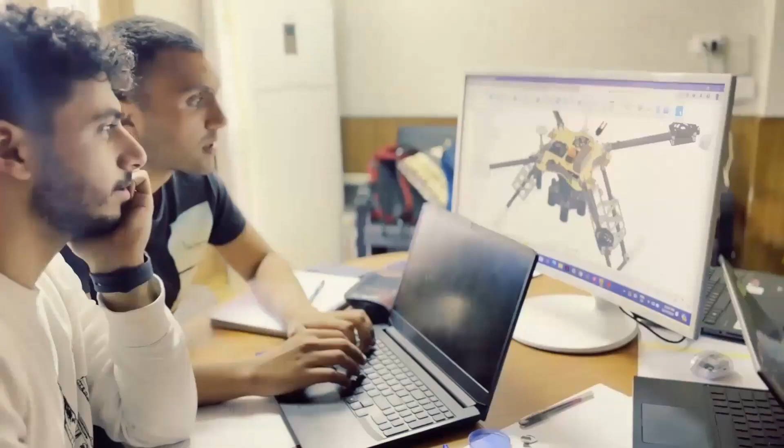This year we have decided to take on a new challenge and build a fully autonomous drone that is fit to compete in the SUAS competition.

For successful mission demonstration, our UAS needs to complete the given mission in less than 30 minutes. We have set the time limit to 25 minutes to account for unexpected events. The 25 minutes are split into 18 minutes of cruising, 5 minutes of hovering for payload delivery, and 2 minutes for takeoff and landing.

We have designed our system to have an average speed of 40 miles per hour in order to complete the 15-mile course in 25 minutes, with 5 minutes to spare as a safety margin. Also, the batteries must not get under 20% state of charge.

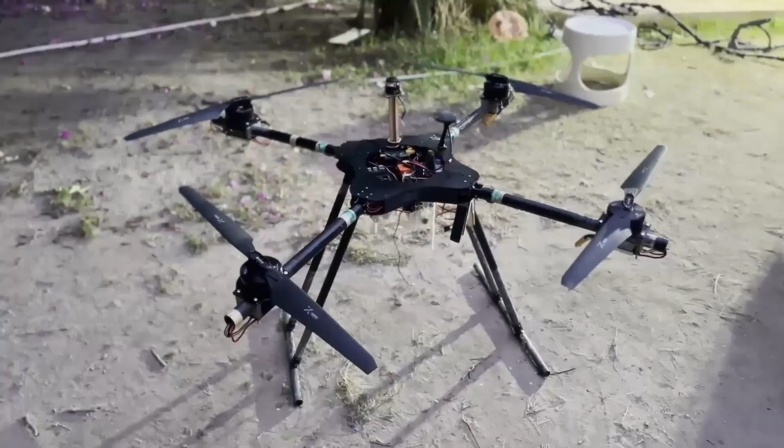Our UAS must be capable of obstacle avoidance and must remain inside the designated flight boundary. It also has object detection and payload delivery capabilities, which are all conducted autonomously.

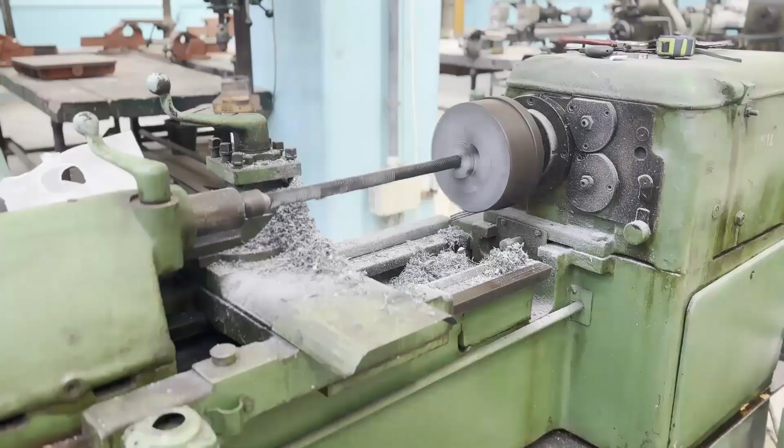Raven, our first ever quadrotor UAV, is made out of locally manufactured carbon fiber tubes and sheets due to its high strength and minimal weight. Our UAV has 4 motors coupled to 30.5-inch propellers.

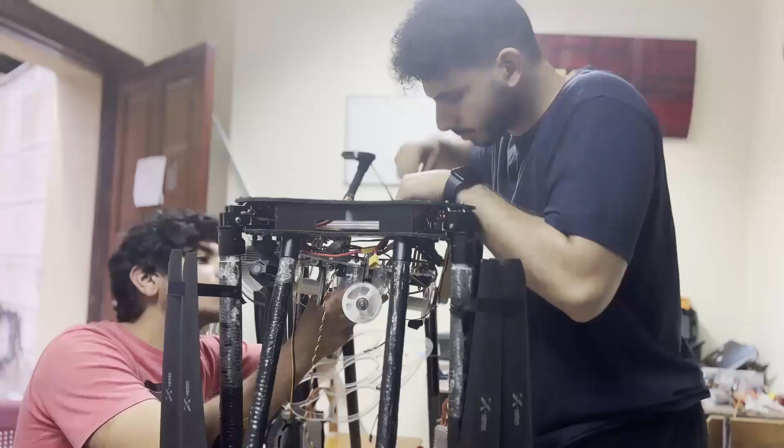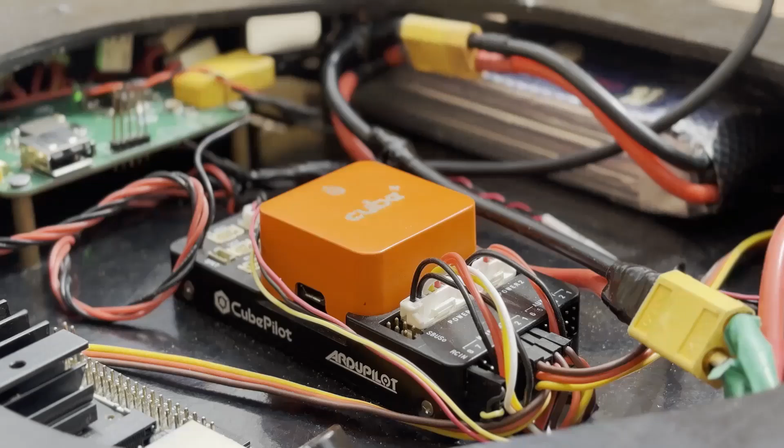Raven is powered by 4 6S 28Ah lithium-ion NMC semi-solid-state batteries. A smaller 7.2Ah battery and a custom-made PCB were used to power the auxiliary system, as well as the dropping mechanism servo motors. To achieve autonomous flight, we used an Orange Cube Pixhawk flight controller and Here 3 GPS for positioning.

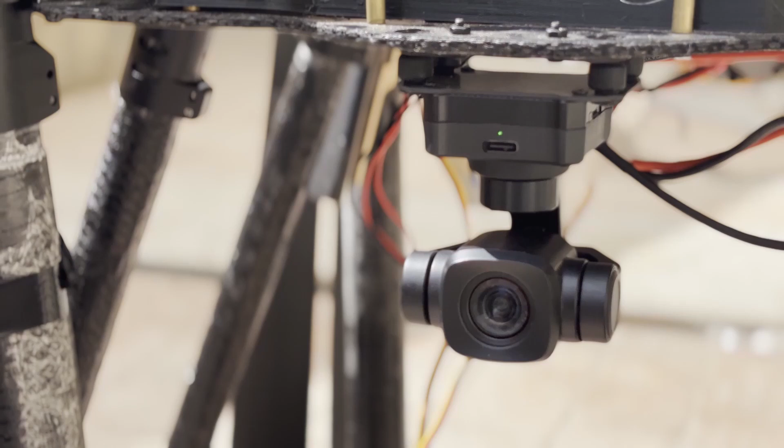Here Link is used for RC control, and Here Link Wi-Fi is used in linking the ground control station with the Jetson Nano, our onboard computer. For the imaging system, we use the SIYI A8 Mini, which is connected to the Jetson Nano. Together, they are used for object detection, classification, and localization.

Our communication link is split into 3 frequencies: 900 MHz, 2.4 GHz, and 5 GHz. Our dropping mechanism was designed to achieve high precision and speed while maintaining simplicity and reliability.

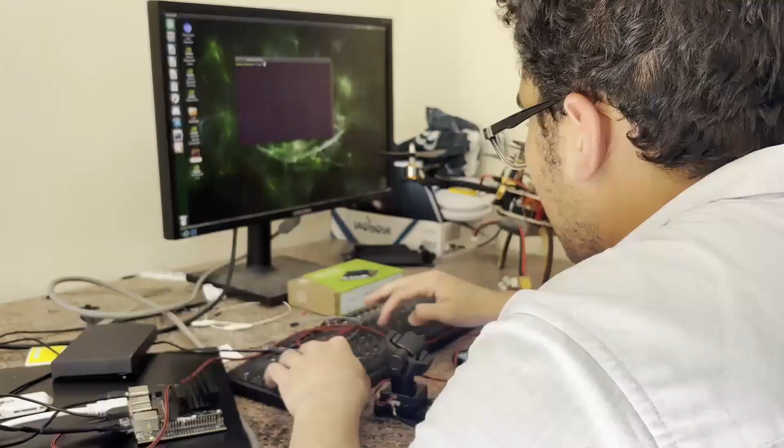Imaging and ODLC: for our imaging system, we chose the SIYI A8 Mini camera for several compelling reasons. It weighs only 95 grams and supports high-resolution video capture at 1920 by 1080 pixels, 30 frames per second, and a 6x digital zoom capability, delivering sharp and smooth footage.

It has a 1/1.7-inch image sensor and offers a wide field of view of 93 degrees, enhancing the overall visual coverage. Based on our calculations using the focal length, numerical aperture, and sensor size, we have determined that the objects will appear clearly within the required range.

Additionally, the SIYI A8 Mini camera features a built-in gimbal compatible with ArduPilot, providing excellent stabilization for smooth and steady shots. We also compared between multiple cameras such as the Raspberry Pi HQ camera and the SIYI ZR10.

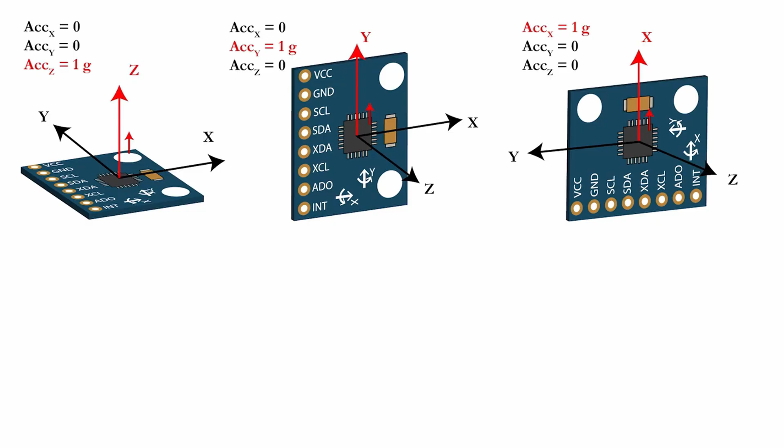During the development phase, our initial approach involved using an Arduino microcontroller and MPU 6050 sensor running a Kalman filter algorithm. This method was designed to process sensor data efficiently and maintain stable camera positioning through advanced filtering techniques.

Another method we considered utilized the Pixhawk's built-in IMU data and applied a low-pass filter for smoothing. However, after careful consideration and testing, we decided to use the A8 Mini's built-in gimbal. This decision was based on a variety of factors including efficiency, reliability, simplicity, weight, and overall performance. To train our models effectively, each was trained on a different dataset.

For our color classification model, a dataset of 40,000 RGB color ranges was extracted for the targeted colors using custom software. The dataset's accuracy was validated using a custom tool where each sample was visualized and inspected.

Additionally, we developed a custom dataset generator which we used to generate 18,000 images. This involved generating random backgrounds, overlaying shapes, and adding alphanumerics on top of them. We applied blur effects to those shapes to make them look realistic. Furthermore, we utilized the MetaSam model to automate the annotation process for the image segmentation.

For our shape detection and classification model, 20,000 images were gathered and filtered. The dataset includes the shapes of circles, semicircles, quarter circles, triangles, rectangles, pentagons, stars, and crosses, besides human mannequins. These images had a resolution of 640 by 640 pixels and included annotations for each shape.

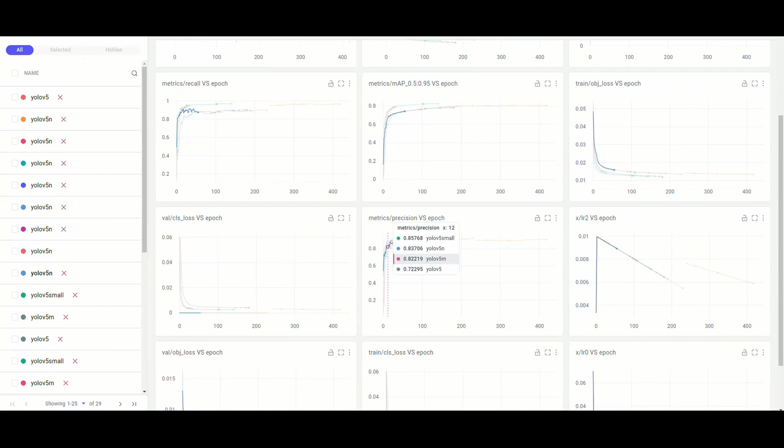In order to detect and classify the shapes, YOLO V8 was chosen for this purpose. This choice was made after training and testing different YOLO models. After training, we evaluated each model's performance and accuracy, and V8 gave the highest accuracy and minimum inference time.

Upon shape detection, the shape is cropped from the image to concurrently classify the alphanumeric and the color of the shape and the alphanumeric. This approach is executed using multi-threading to minimize processing time.

YOLO V8 is employed again for alphanumeric classification. During the selection process, YOLO V8 was benchmarked against models like ResNet 50 and Inception V3. Comparison metrics included training and validation curves as well as inference time, ultimately validating YOLO V8's superiority for alphanumeric classification.

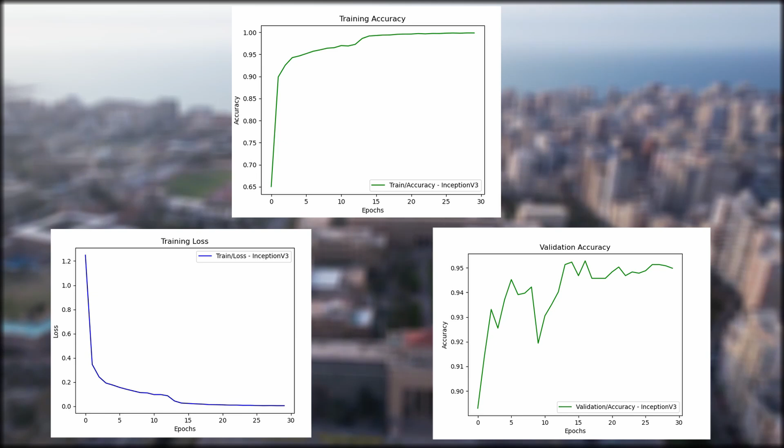Before color classification, a UNet model segments the shape and the alphanumeric character from the background. K-means clustering algorithm is then used for extracting dominant colors with k equal 2 to get the clusters of shape and alphanumeric separately. A machine learning model trained with 40k RGB values that we made is then used to find the corresponding colors obtained from the k-means clustering.

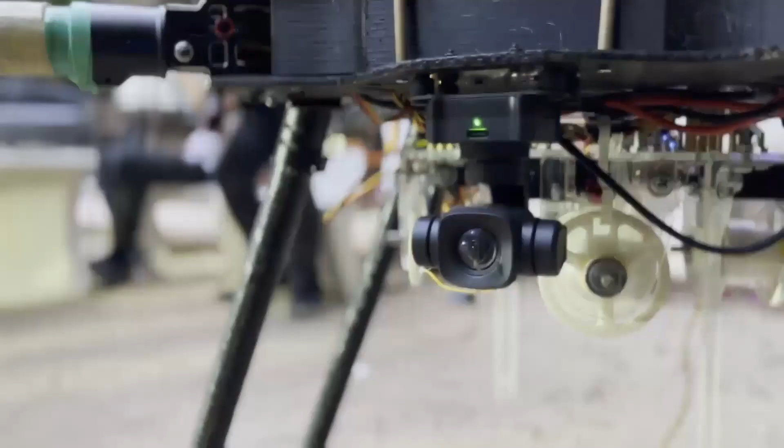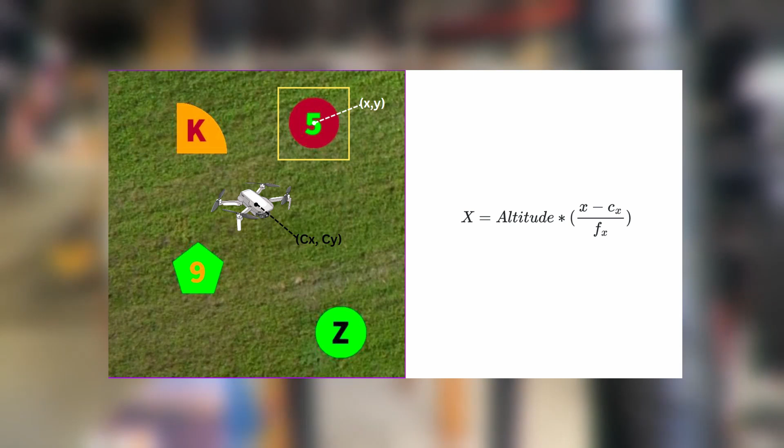Localization was achieved using the camera and the GPS module. The target's longitude and latitude were obtained by measuring the target's distance in pixels from the image's center. Using the camera's 21mm focal length, we were able to convert this distance into meters and then into GPS coordinates.

Airdrop design and testing. After conducting tests on several dropping mechanisms, a servo braking mechanism was used due to its lightweight and simplicity. A custom servo arm was designed. One side is responsible for holding the pulley in place during flight, and the other side is used to brake the falling water bottle to ensure smooth landing.

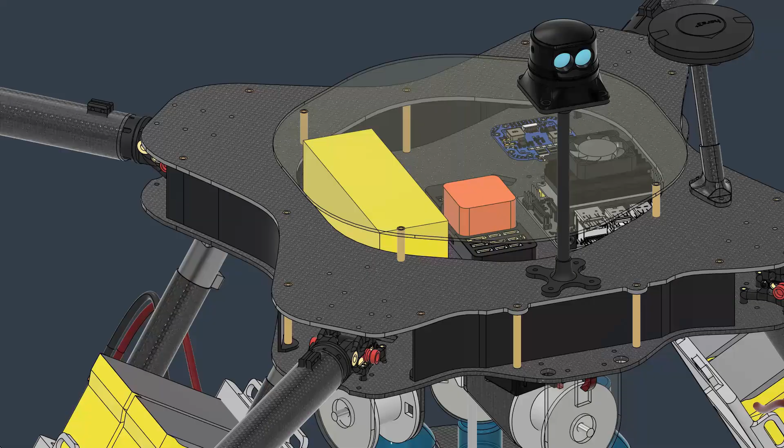Communication design and testing. Our communication system consists of 3 links: a telemetry link using RFD900X, a Wi-Fi link, and an RC link using the HereLink, as shown in our communication diagram. The telemetry link, which is a high-performance 900 MHz radio modem with a 40-km range, enables data transfer between the ground control station and the UAV, achieved using MAVLink, a lightweight messaging protocol.

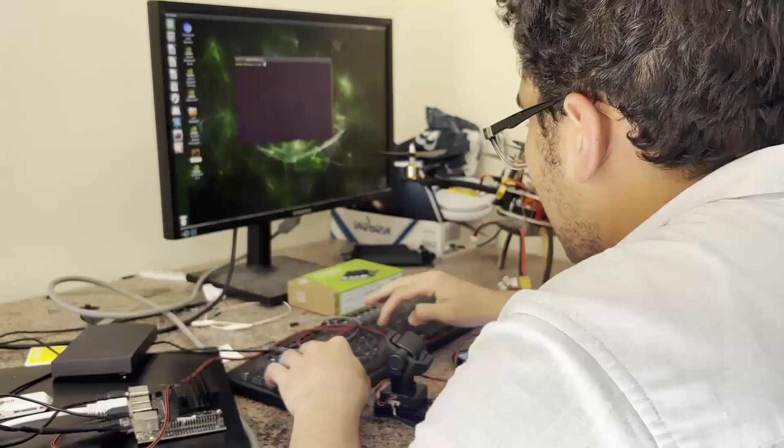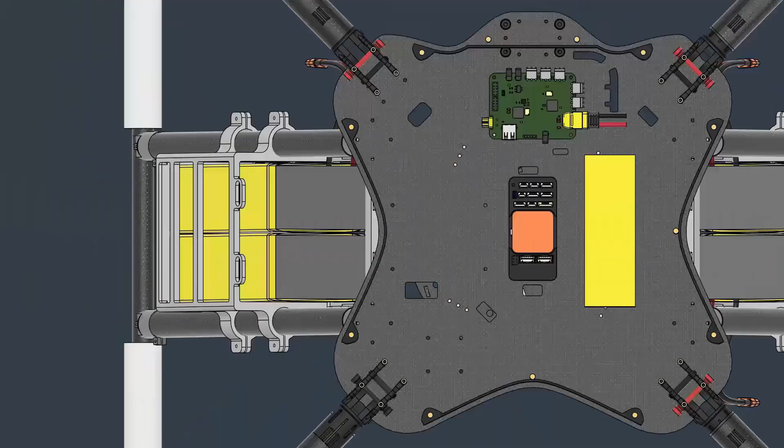The second communication link is the Wi-Fi link. For the Wi-Fi link, we have 2 methods that we can choose from. The first method consists of the HereLink Air unit and the HereLink Ground unit and is used for communicating between the Jetson Nano and the GCS to transfer images, data, and to control the mission from the GCS. This link is done by connecting the Air unit to the Jetson Nano via Ethernet port.

The second method is done by connecting both the ground control station and the Jetson Nano to the same virtual Ethernet networking service, such as ZeroTier. This approach ensures that the GCS and the Jetson Nano are part of a secure and encrypted virtual network over the internet, enabling the Jetson Nano to transmit data, images, and receive commands from the GCS.

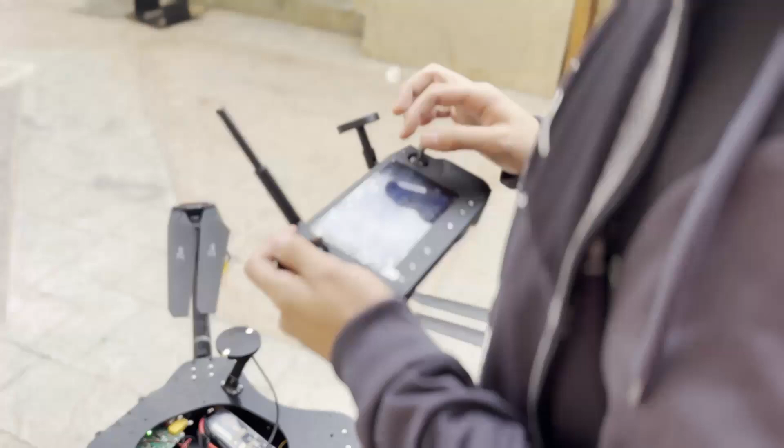The third link is the RC link of the HereLink. The HereLink uses a 2.4 GHz frequency band and has a range up to 20 km with latency as low as 110 milliseconds. It's used by the safety pilot in case of emergency.

Alternatives considered: we looked at using the Ubiquiti Bullet AC on the drone side and the Ubiquiti Nano Station AC on the ground control station for the Wi-Fi link, but found complications such as the need to install an antenna tracker on the GCS side. So we decided to use the HereLink, as it surpasses all aspects in establishing a stable Wi-Fi link.

For Raven's frame, we used carbon fiber as it provided high strength while keeping weight at a minimum. We manufactured our own carbon fiber sheets and tubes with the help of professionals at our local shipyard.

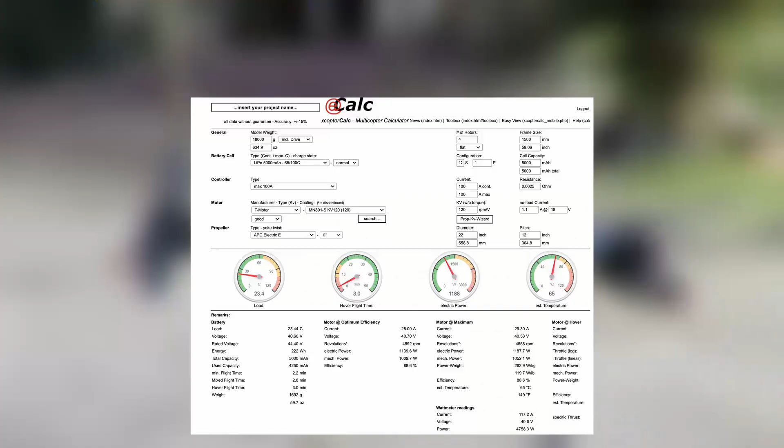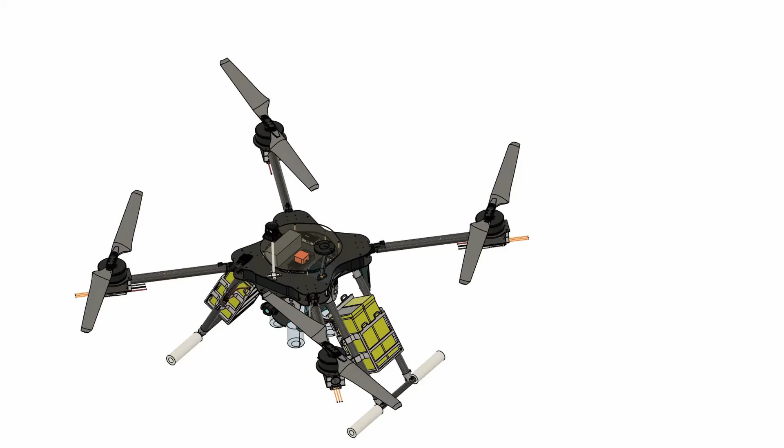For our propulsion system design, we used performance analysis and constraint analysis to determine the most optimal drive configuration for our UAV. We chose T-Motors P80 III 120 kV motors coupled to 30.5-inch propellers and Alpha 80 ampere ESCs. This configuration provides a maximum of 72 kg of thrust, allowing us to achieve the required thrust-to-weight ratio. For the batteries, we use four 6S 28 ampere-hour batteries.

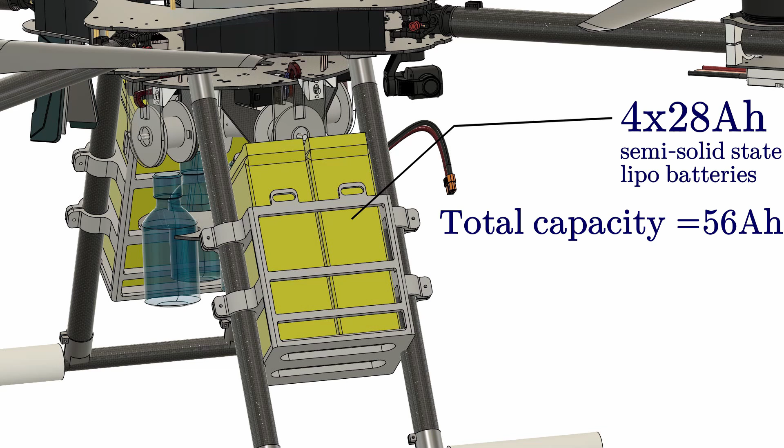We connected each two in series and then two in parallel, providing a maximum capacity of 56 ampere-hour. Batteries are mounted on the landing gear for stability and to provide enough space for our system.

For our autopilot, we chose the Cube Orange Plus. It's equipped with a high-performance H7 processor, which provides a high-performance and stable solution for flight. It's also equipped with a real-time triple redundant temperature-stabilized IMU system, which provides backups if errors occur, enhancing safety and reliability.

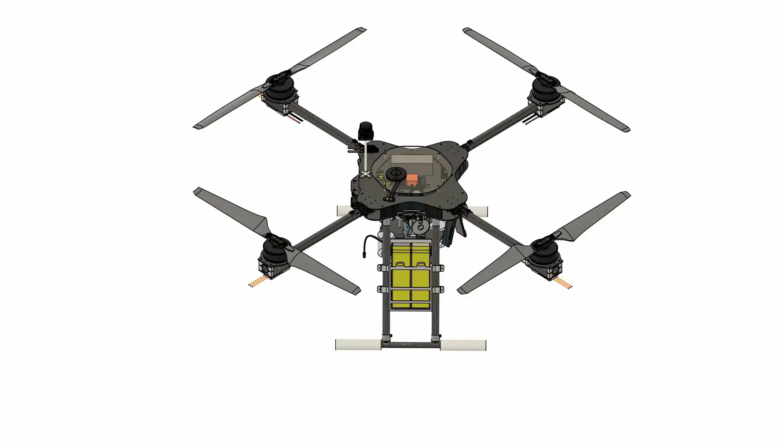To accomplish our mission autonomously, we developed a custom navigation software using the DroneKit API. While the vehicle is on the ground, our custom navigation software starts by planning the navigation path to ensure moving in the shortest path possible between each two waypoints.

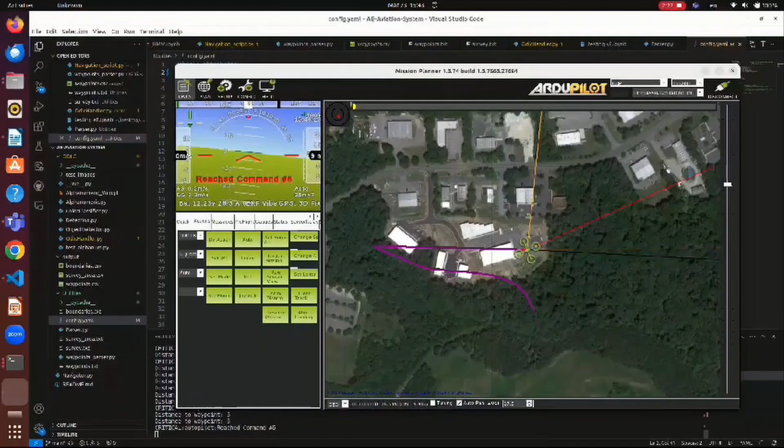After that, the software sends the necessary commands to the Pixhawk to initiate a safe takeoff. After taking off safely, the software sends the necessary commands to the Pixhawk to complete one lap across the waypoints and then head to the survey area.

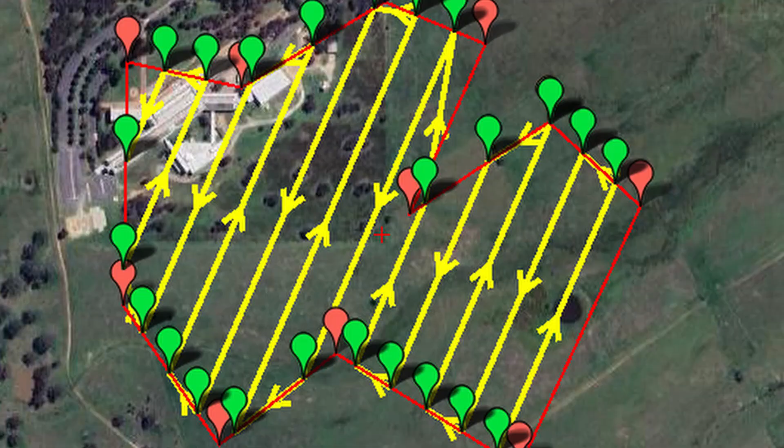Our team carefully evaluated multiple sensor options. Ultimately, we selected the Lightware SF45B LiDAR. It's lightweight, robust, and possesses an impressive 50-meter range in bright sunlight conditions. Additionally, the SF45B integrates seamlessly with ArduPilot.

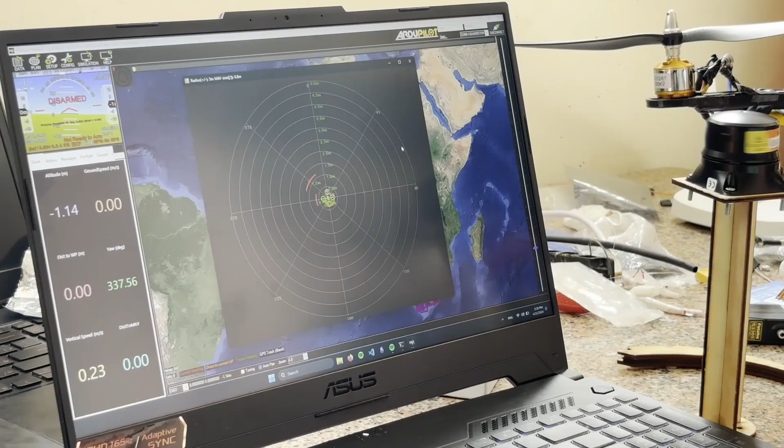ArduPilot's obstacle avoidance functionality employs a hybrid approach, utilizing the bendy ruler algorithm for local path planning to navigate around proximity-based obstacles, while globally rerouting via Dijkstra's algorithm to identify the shortest collision-free path.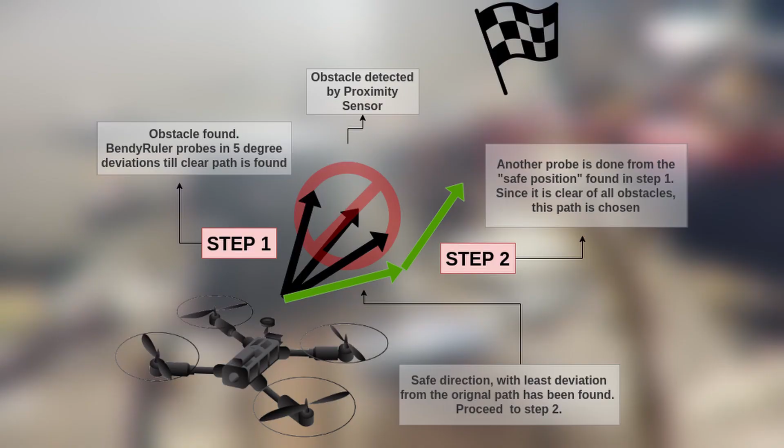Around geofenced areas, we considered the RP LiDAR A2M8 for its 360-degree range and easy ArduPilot integration, but we rejected it due to its poor performance in direct sunlight and its low detection range of 8 meters.

Due to strict regulations on drones in Egypt and difficulties faced while trying to obtain flight permits, simulation has played a vital role in refining our capabilities.

Simulation environments like Gazebo and SITL, software in the loop, help us perfect our drone's mission execution. These tools provide a cost-effective and legal way to test and validate drone functionalities without the expense and risks associated with real-world testing. This is particularly crucial in early development stages.

Simulations allow us to replicate a wide range of scenarios and environmental conditions that might be challenging or rare to encounter in real life. This helps in understanding how the drone will perform under various circumstances.

We also used simulations for integration testing of the navigation system with the ODLC system. This ensures that all components work seamlessly together before actual deployment, minimizing potential issues during mission execution.

By leveraging simulation tools effectively, we can enhance the reliability, efficiency, and safety of our drone operations, ensuring that they meet the demands of complex missions and environments.

Due to the team's previous experience, we were inclined to design a fixed wing or a VTOL, but after conducting trade studies, we decided to switch to a rotorcraft approach due to the inadequate turning radius and low airdrop accuracy of the fixed wing and the VTOL.

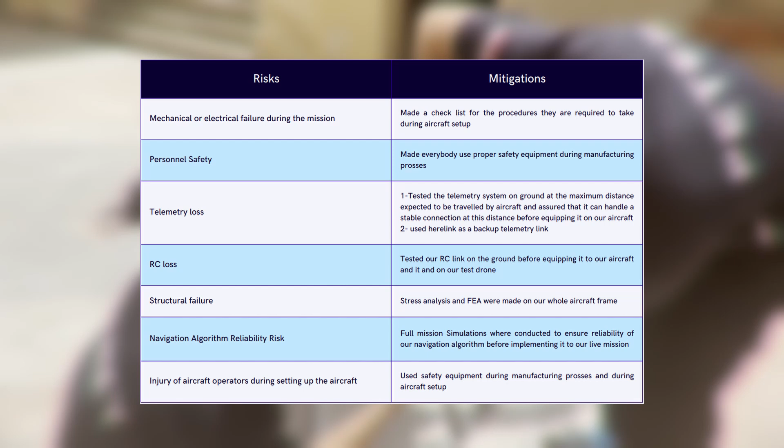To combat mechanical or electrical failure, we've created checklists and safety protocols for setup and manufacturing. Additionally, we've constructed a test drone specifically designed to rigorously test all systems before actual deployment, ensuring thorough testing and reliability. Telemetry or RC loss is minimized through rigorous ground testing and the use of backup systems.

Structural integrity is ensured through thorough stress analysis and finite element analysis of our aircraft frame. Navigation reliability is guaranteed with full mission simulations to verify accuracy before deployment. Operator safety is paramount with mandatory safety gear worn during all phases. With these measures in place, our mission is set up for success.

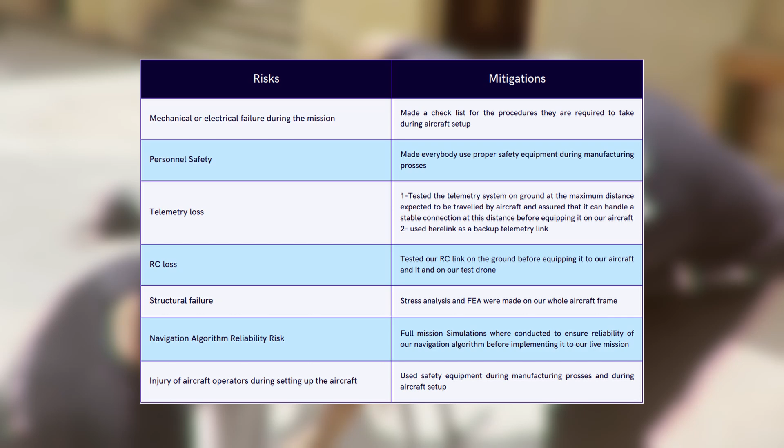We evaluated our models on a customized dataset, which was a very challenging dataset, and it's not available for public release. Our shape detection model was tested on a test set of 220 samples, achieving a classification accuracy of 96.82%, a precision of 0.9, and a recall of 0.96.

As for our alphanumeric classification model, it achieved a classification accuracy of 95%. The color classification model was tested on 1,726 samples, successfully classifying 95% of the shape's colors correctly and correctly classified 78% of the alphanumeric colors.

Our flight termination system is triggered upon completing the mission or in the event of a lost communication link. It initiates automatically after the autopilot receives a termination signal. Once activated, the flight termination system executes the necessary procedures to transition the vehicle to a low energy state, ensuring a safe landing at the designated termination point.

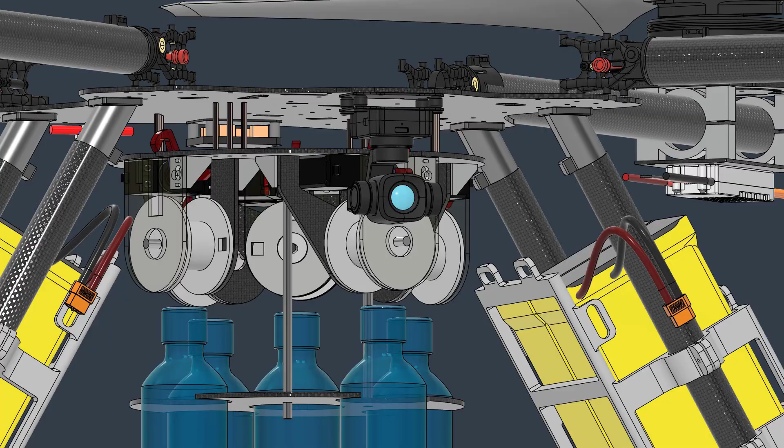We have made significant efforts to strategically place components, taking into account factors such as environmental influences and potential sources of interference, in order to optimize performance and minimize external impacts. Our Pixhawk flight controller is positioned at the center of gravity of the drone, which is crucial for stable flight. Secondly, by keeping it away from the batteries, we minimize electromagnetic interference, safeguarding the Pixhawk's functionality.

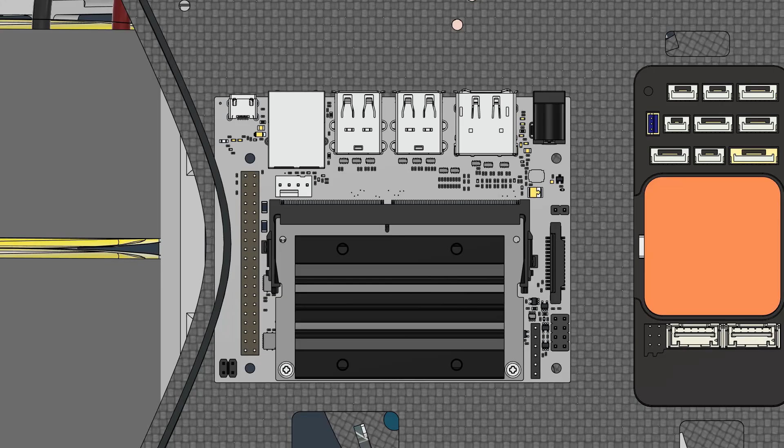For the Herelink antennas, we've made a deliberate choice to mount them on a non-conductive material to prevent interference with signal transmission, affecting range and performance. Additionally, we've oriented the antennas vertically with a 15-degree rotation. This optimized alignment enhances signal reception and transmission, ensuring reliable communication with the drone.

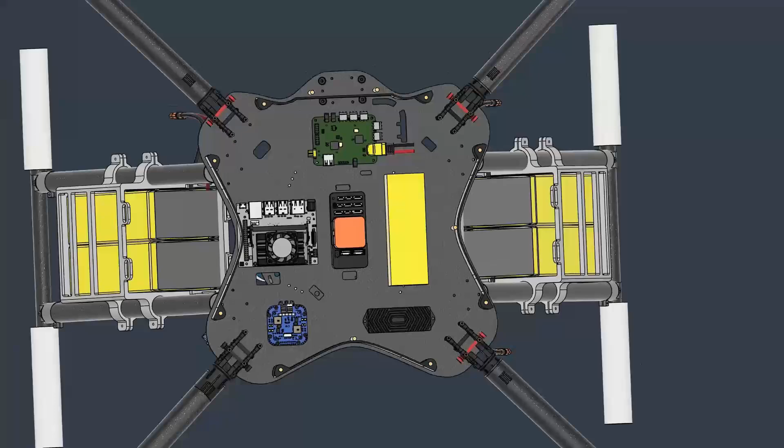The RFD900X telemetry is placed far away from the carbon fiber to avoid distortions to resonant frequency, gain, and radiation pattern, which can impact performance. By carefully considering the placement of these critical components, we've optimized our drone for peak performance and reliability, ensuring every flight is a success.

We have positioned the GPS module to maintain a clear line of sight, ensuring accurate positioning data. Additionally, we shielded it from electromagnetic interference by keeping it away from the motors and batteries.

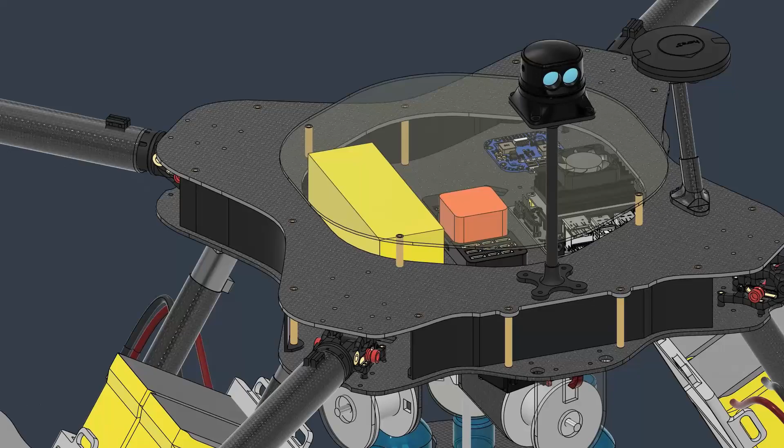We have positioned the LiDAR at a height above the GPS module to provide an unobstructed view of the surroundings for accurate distance measurement and obstacle detection. Securely mounting it to minimize vibrations and potential misalignment is also essential for reliable performance.

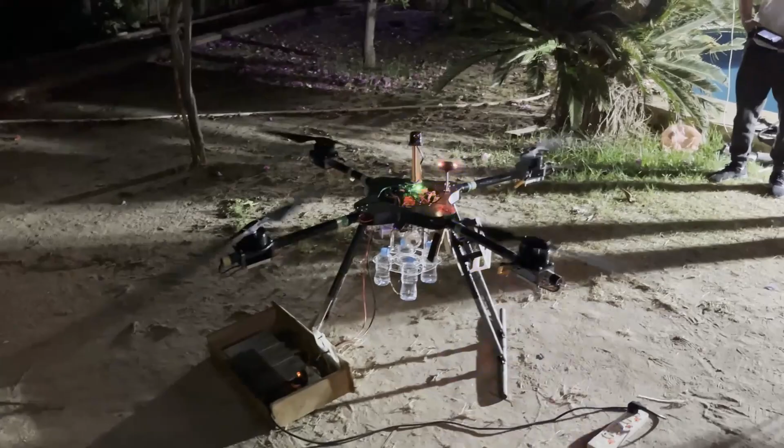Flight Readiness Review. We have faced major issues in importing the batteries required for our UAV due to strict regulations on drones in Egypt, and therefore we were not able to conduct flight tests. We have tested all our systems using our small-scale test drone. We have also tested our propulsion system using AC to DC converters, as shown in the video.

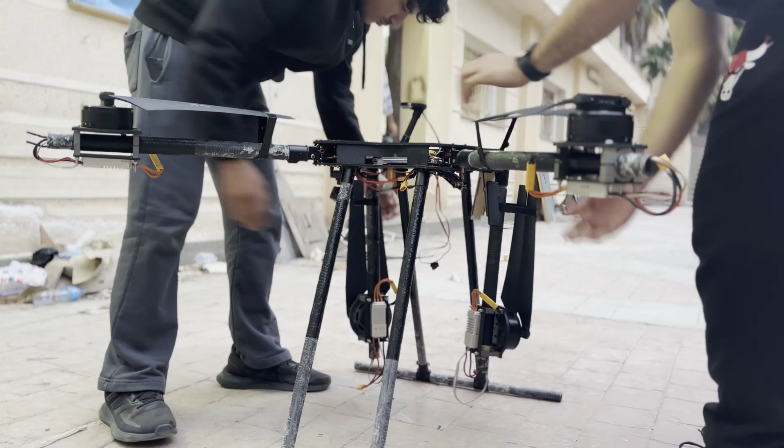The journey to create Raven, our cutting-edge autonomous drone, has been a remarkable experience marked by teamwork, dedication, and innovation. At Alex Eagles, we believe in the power of collaboration, and Raven is the product of a year-long collective effort that brought together diverse talents and expertise.

Raven represents the best of our teamwork, combining AI-driven object detection, classification, and localization to achieve precise payload delivery. Every member of our team played a crucial role in the development process, from designing the drone's hardware to refining its software algorithms. We held countless brainstorming sessions, prototyping stages, and test flights to ensure Raven met our high standards.